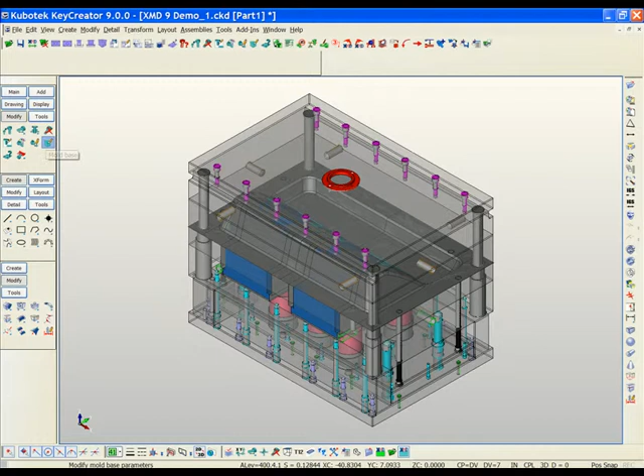Okay, I guess as important as making a mold, it's just as important to be able to modify the mold, because changes never stop in the mold design field. So I want to show you how easy it is to make changes with XMD.

The first thing we're going to do is change this job layout from horizontal to vertical rails.

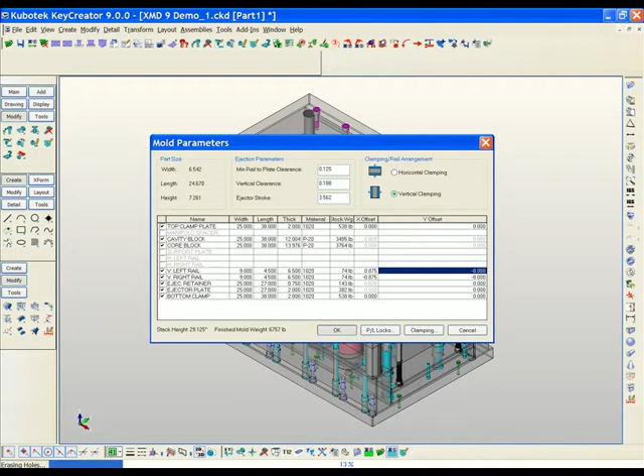So I'm just going back to the mold parameters dialog box, selecting the vertical rail option, and I'm going to shorten the existing rails, and offset them to be down at the bottom of the mold. Then I'll add new rails and add wings to the ejector plates.

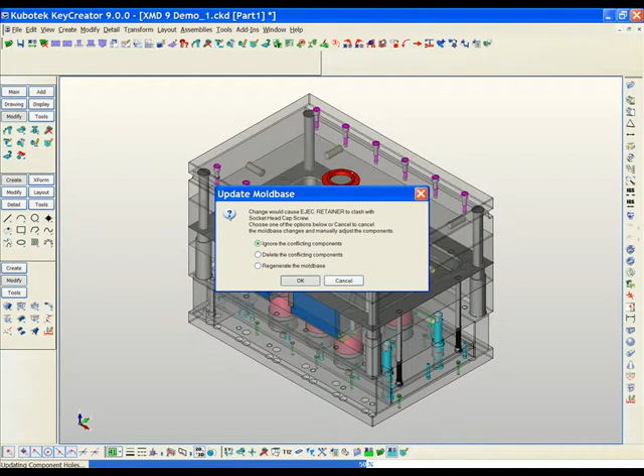And of course we're going to add hydraulic cylinders and all that fun stuff as we go along. So XMD's asked a couple of questions here. I'm just going to ignore the conflict of the screws colliding and leave them there, and just show you how easy it is to actually delete these things, holes and everything included.

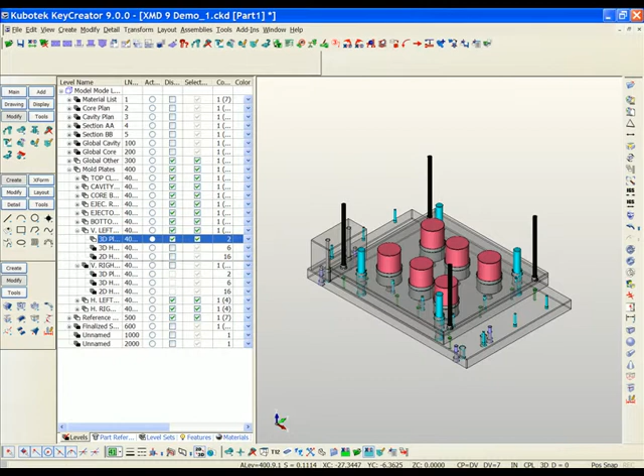Simple level management. I'll turn on the existing rails, and you can see how I shorten them and offset them, and some screws move down with them, and the existing screws that I left there I'll just go and delete.

Alright, so here is the start of my new layout. I'm going to need a couple more rails up at the top. But first we'll go ahead and we'll just window around those screws that I want to get rid of.

You notice just by windowing around the screw, the hole in the bottom clamp plate and the rail and wherever the other holes were are deleted as well.

So these are called external plates, and I'm going to establish the size. I'm going to call it a rail, make it 1020, and I'm going to establish the size.

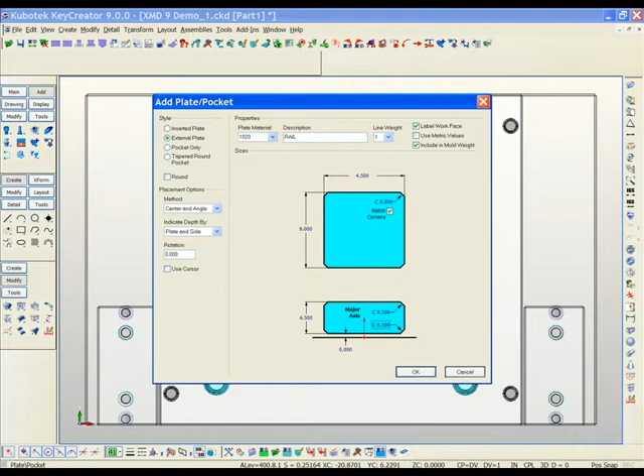Alright, so here comes the silhouette of my plate. I'm just going to place it right on top of the existing rail, and I'll select the plate depth option to set it on the top of the bottom clamp plate.

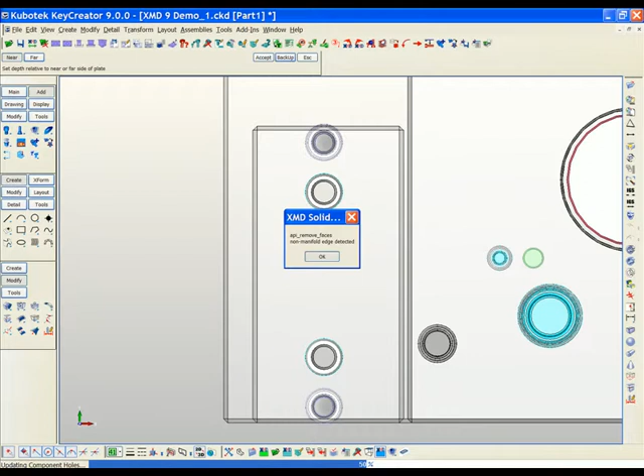Alright, so when I put that plate on top of the existing plate, it assumed all the same characteristics of the existing rail. So now I'm just going to take my new rail and mirror it across the center of the mold.

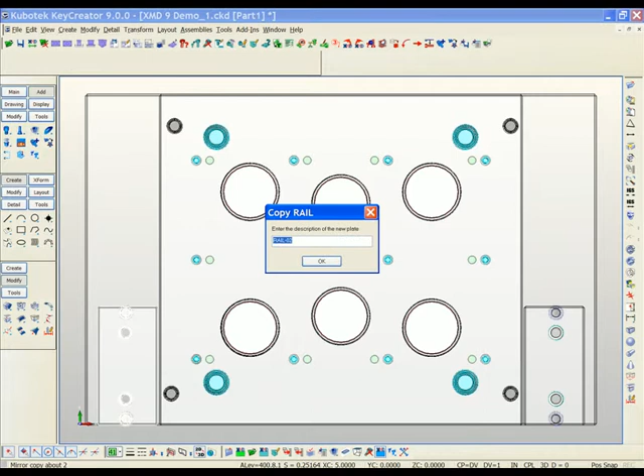XMD prompts you for a new name, so it's keeping count of these new rails and existing rails, and everything will be updated in the bill of materials. So there's one new rail, and another quick copy to the other side, and our whole rail set will be established.

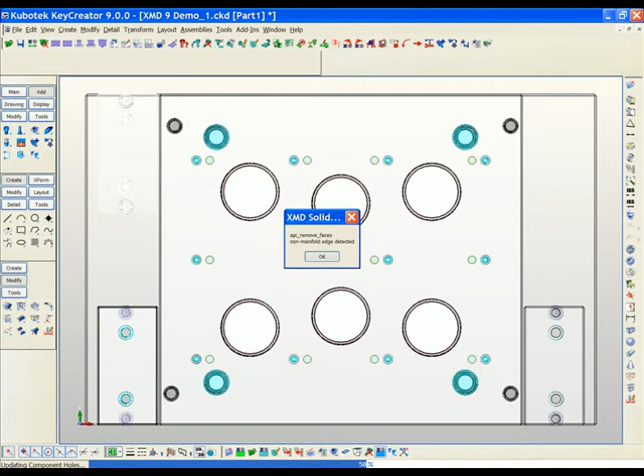Alright, so once again, all the holes are there, rails through, there's holes through the rails, the tapped holes into the back plate, or the back of the core. Everything we need is there.